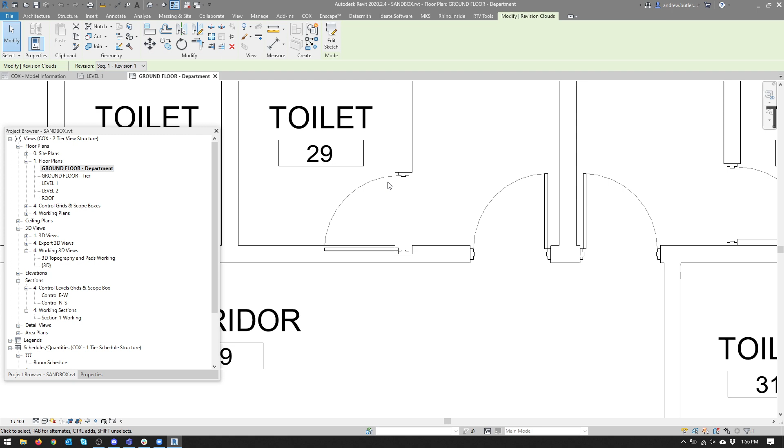So we can redesign the same thing we've done before over and over again from scratch, which is currently the way we're doing it. It's a little bit assisted with some of the Revit families, for example, from the past, with styling details like how a door connects to a wall, so you don't have to redraw it again. But I think what your role could be is to say, okay, can we inspect what we've got in the existing databases, take some information out of there, and bring it to a new design.

So when a designer—a senior architect—starts designing a new project, can I give that person immediately more information than normally? When you talk about visualizing everything, for example you mentioned going to the GSPS, using a script, creating logics so that for this project everything would be applying the law—little things like that.

You mentioned just then that it could be reused over and over again, like in different works. Does that mean once we create something we don't become redundant?

No. When do you think—at what point do you think a Formula One engineering team, running their Formula One car... I don't know how fast they go, but let's say they broke the world record for Formula One cars—at what point did they say, you know what, we've finished, we don't have to make this any better?

Well, but in that case, to improve something—the more you improve it, the more resources it's going to cost, right? I disagree. If anything, the more you improve something, the cheaper it becomes to improve further with what we're doing.

So it's easier—the same amount of effort it takes to improve it will yield even more improvements, because the amount of effort it's taken the world to try to digitize planning information, like producing a standardized digitized planning platform, has been very difficult and it's still not finished. But if you look at some countries and cities that have done it, now it only takes them an ounce of effort to improve that information because they've got it in a digitized format.

It's a really big learning curve, I guess, especially having to put it into words - very difficult. Like, I know what to type, all that kind of thing, but it's very difficult to actually get it working. Right, so that's my main problem - what's not working? Well, I understand the concept and everything, but actually getting it on my Revit.

Can you share your screen? Well, it's more the fact that I think I haven't modified the Python or the cluster or anything like that, and I'm trying to add has toilet, but except has meeting. Oh yeah, okay, so how do we do that? Is that what you're talking about? So you want to add extra functions to this thing. Yes.

We want to, in this case, divide the process up and tackle a different type of analysis.

When you say it has a meeting room, what does that mean? I was thinking if it just has one table, it will reconfigure it as a meeting room, sure, like how if it has a plumbing fixture, it's classified as a toilet. So someone hasn't named the room, but they've put a boardroom table in it, and it immediately gets flagged as a meeting room, which does exist in hotels and exhibition centers. They have hireable meeting rooms for conferences and stuff like that. That's what I was getting to. Cool.

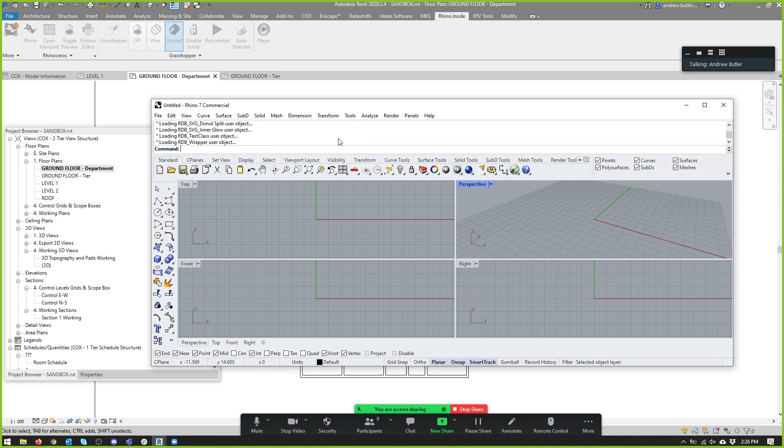You get to learn about all those different types of buildings. If you work on lots of different sectors, you get to work on sport and everything. You actually get to learn about what happens in the world behind closed doors, like the back of house of train stations or hotels. How do hotels actually operate and what do they need? You learn about people, and then you have to put that into your buildings. It's very people-oriented, like people trying to earn money and live.

Let's go back. I have to remember which CSS we were using. Was it CSS Dev? Yeah.

Andrew, can I ask really quickly? Yes. Why did the CSS that I copied to unit work? No, sorry, just the search. This is like a syntax question. Why is it like backslash-b unit backslash-b?

Okay, so this is regex. Have I mentioned regex to you guys? Yeah. And I guess you just coded it into the actual dev already, or what? Did you already code that in? Oh no, but yeah, it was an empty one.

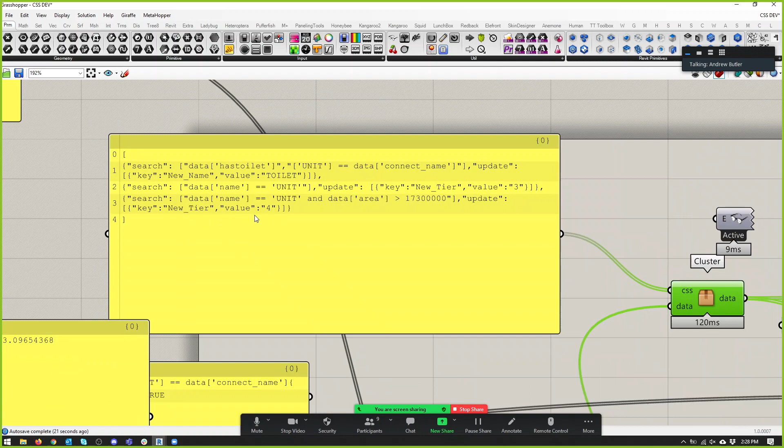And so that's what we're accessing when we type re.search unit blah blah blah blah. So the backslash-b, let's see if I can spell it... there we go. If we go to regexr.com, that'll tell us that backslash-b refers to a word boundary, and capital backslash-B is a not-word-boundary.

This gets a little complicated, but what it's actually doing is recognizing that the space is the boundary to the word. If I said 'hey, now I'm going to go right,' that includes also up here. Instead of typing backslash-B, instead of putting a space, we're saying we're only considering space as a boundary to a word. It's not going to pick up 'includes' that starts at the beginning of a line, and it's also not going to pick up 'includes' at the end of a line, because a period or full stop is not a space bar.

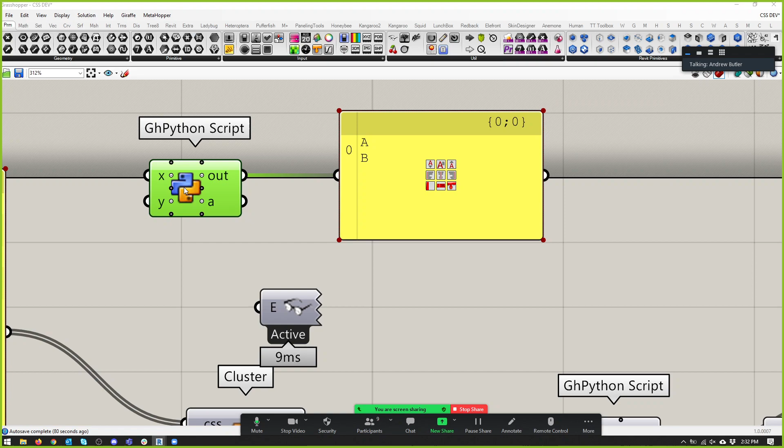So if I go 'hey, includes' with a backslash-B and backslash-B, it doesn't work, it's not picking that up. If I want that to work, I have to put a double backslash, which escapes the backslash and makes it a literal backslash for it to get picked up. And so that's what we're seeing here: we're writing this so that when Python reads it, it knows we're escaping this backslash, so that the regex we're writing is backslash-b unit backslash-b.

Welcome to the inception world of coding. But does that make sense? Yeah, no context. Yeah, cool.

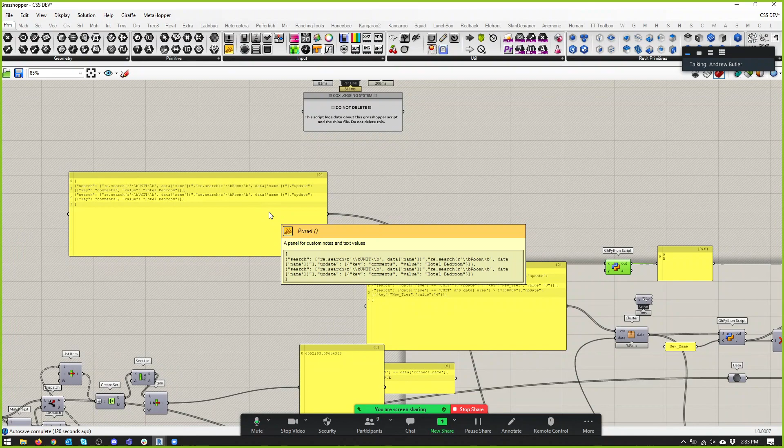Now back to your question. What we coded here is a super shortcutty way of doing what we need to do, right? What we'd rather do, I think, is, let's just say we're going to pick up, I don't know what families I've got in this job, but let's go see.

Place a component. What component do we want to place? Let's put a bed in, right, seeing as it's a hotel.

Let's say we don't want to call these units anymore, we want to call these bedrooms. Like we're going to automate that process. The thing is, that's going to ruin some of our other code, because we're saying that if a room is next to a unit, blah blah blah. But we'll do this anyway.

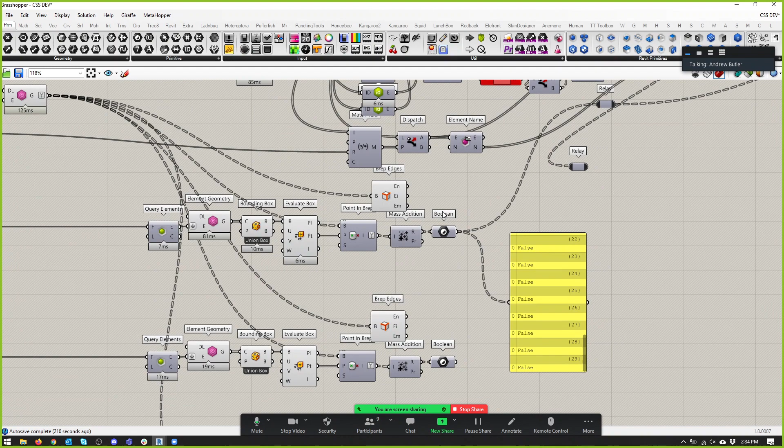So, does this have a room? Yes, and it's called unit. Let's just call it room, or let's call it test. What I've done poorly is, this is saying, hey, just grab plumbing fixtures and make a fixed parameter which has toilet, and set that to true or false.

What we'd rather want, I think, is some kind of parameter that just collects a bunch of things. So one thing we could do is say, okay, see this bed? It's called, like all these family names, says bed, rectangular placeholder, single bed, blah blah blah, lots of really complex stuff. What we could do is simplify that and just have in its class name bed.

And the bed is, let me just check its category, because Revit absolutely loves its categories. It's probably furniture, okay cool. And your meeting room table is probably going to get classified in furniture too.

So I'm also shortcutting, like I shortcut a lot. This is currently an instance parameter. You understand instance and type?

So if I place another bed, I don't know how to do this properly, because I don't actually know Revit well enough. But if I put a bed in this room, that doesn't have the class bed on it. So I believe what you have to do, if you go to edit type, you have to somehow make this family have class in here rather than out here. Does that make sense? Yeah.

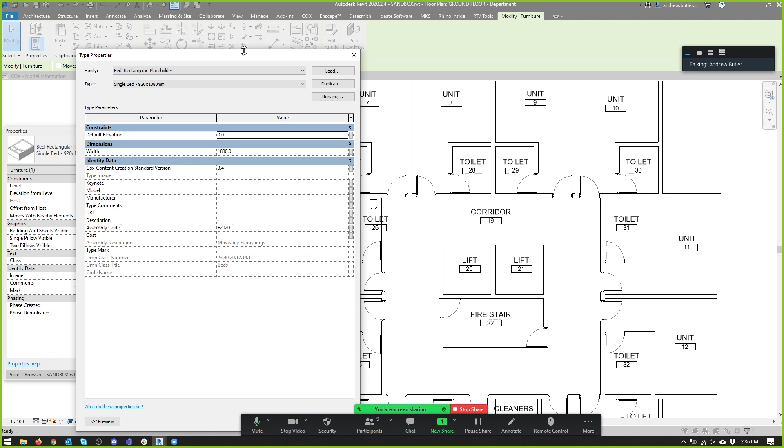Is it like when you mentioned that you get other people to pre-prepare for the CSS? Is that what they have to do? Kind of, yeah. Like you'd want all your beds to have the class bed on them. Yeah, so that way you can.

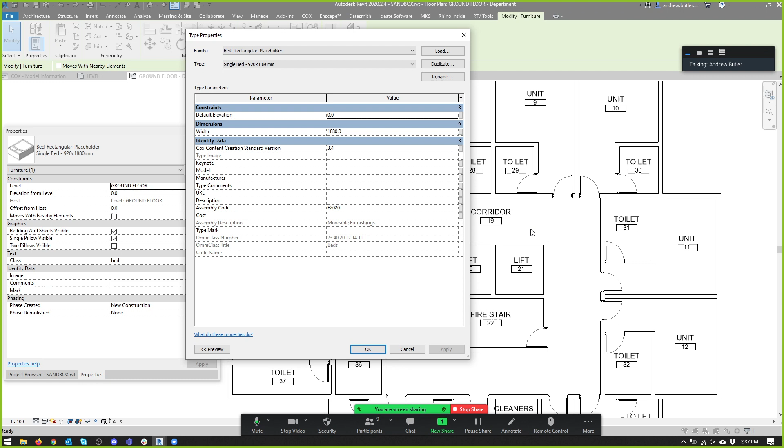Oh no, I think I know how to do it. But we have to define another parameter, and that's type based, and then it will show up here. But we'll use the instance parameter one for now.

So we'll go get furniture, and what this is currently doing is it's saying, this is going to get a bit complicated. It's grabbing all the furniture, and it's going to work out whether or not the furniture is in. How much furniture are we picking up? One? We should be getting 2 at least. Oops. 2, yep, so that's grabbing our furniture.

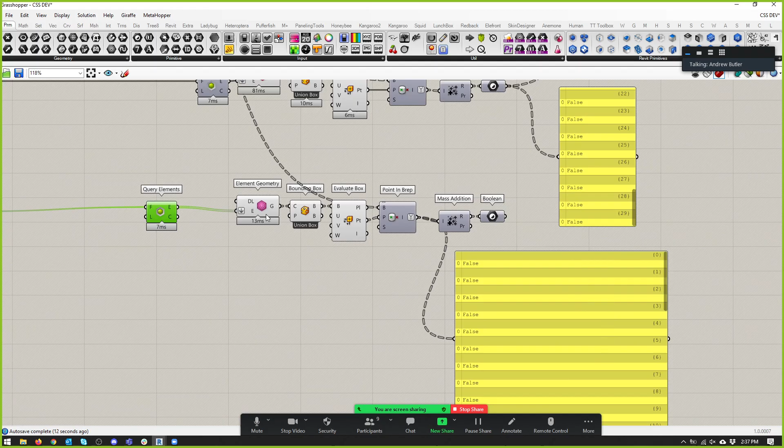And there it is there. Let's just get the curved boundaries of these rooms instead of their solids. So there's the 2 beds, and we're getting the center of the beds, and we're working out... so blah blah blah, there's 2 beds, and this is gonna end up being bad, I think.

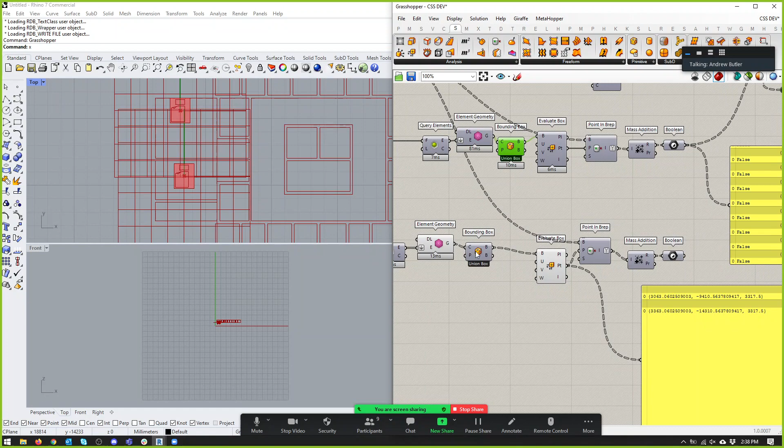Is it? It looks like it. These need to be, I think, flattened.

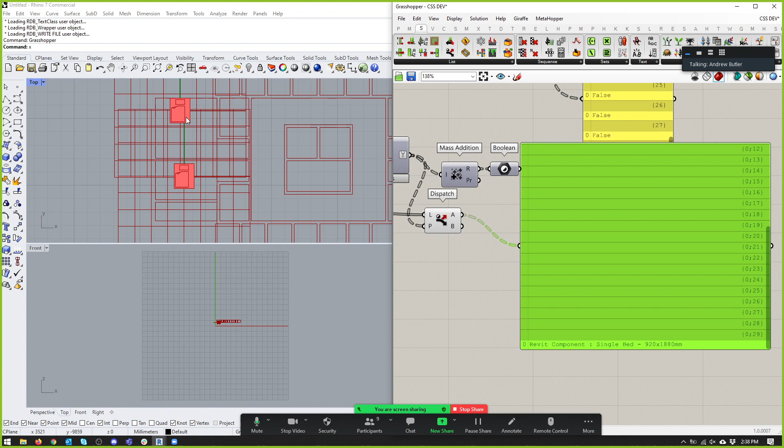So that's going to give us a nice true-false value set for the beds, and we can dispatch the beds per room. So there they are there. So now only, like, in branch 9, which is probably this room, there's that single bed, and in branch 29, which is probably the room I just mentioned, but let's say this room, then there's that bed, right?

And if I put more than one piece of furniture in there, so let's go grab an armchair. That's also furniture, cool, and we class that one. Oops.

One of these rooms has got the single bed and the armchair in it. So we can now move into not needing that 'has toilet' parameter, but rather saying, hey, just produce a list of all the classes in the room.

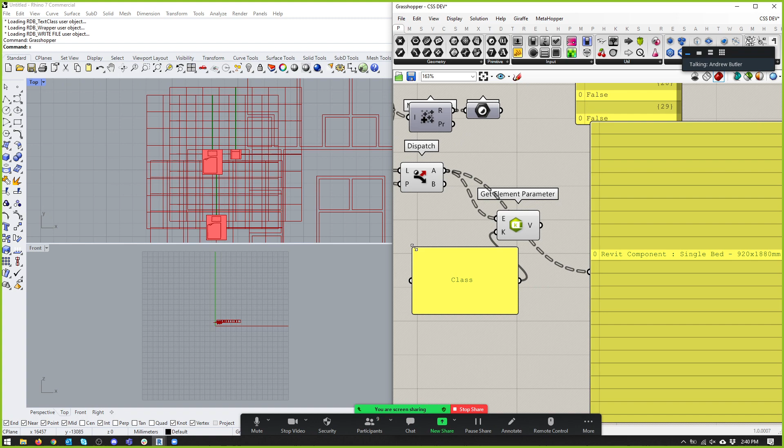So we can say, Revit, get us the element parameter on these objects, and the element parameter we want is going to be class, with a capital C. So there's bed and armchair. Class is just like a fuller version of has toilet, that element.

What we're currently doing is getting the class of objects that are contained in the room. And at the moment, it's only furniture.

Then what we can do, now class could be a few things. So if we say, okay, class is going to be like tags, the way we tag things, the normal way CSS works is it's just a space bar. So this is bed and it's also single. And this is an armchair, and guess what, it's also a single armchair. Like it's a single person armchair, right, a single.

Actually, this doesn't work, let's not do that. Let's just go armchair comfy.

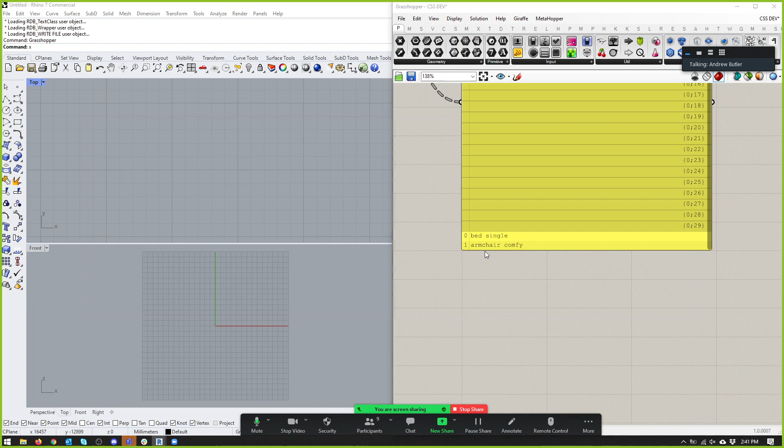So it's got a single bed in it, a bed and single. And some people might even say, okay, if you're going to write single as a class, it should actually be single bed, because we don't want single to get tied up with other singles in some way.

But then what we want to do is combine this into just a single list or a single parameter. So the way I would do it is I'm going to join my branches by using the delimiter that the class uses.

Why is that not working? Is it because these aren't actually texts? Okay, let's call it, I don't care.

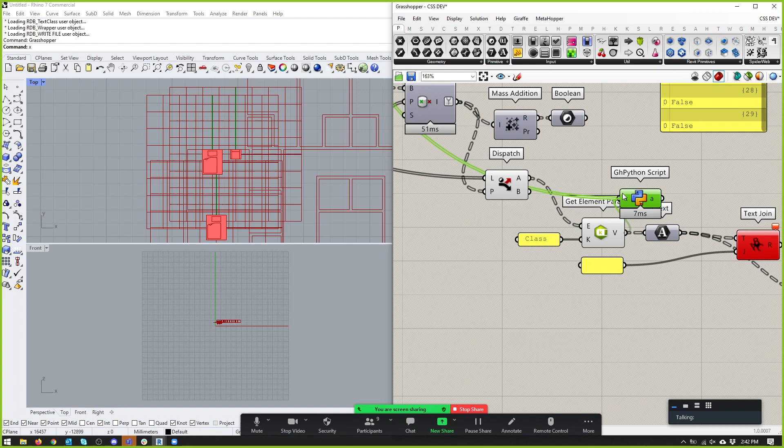Just so you're aware, did I mention this last week? The Revit nulls are different to Grasshopper nulls. I think I did mention this, right? There's a little Python component I've put in here. Yeah, there it is, that solves the problem. Actually, it's probably better to do it this way.

So that gives us a bunch of empties and these guys. Then we're going to split that because we're just going to turn this into a list. So we're going to split it by space, which gives us that list there.

We can probably get rid of all the duplicates. Do you guys know what to do if you want to get rid of duplicate values in a list? Think about Python. A list in Python is just a list of items, so I can have 1, 1, 1, 2, 2, 3, 4, and 5. What's the name of the object that can't have something repeating? Very close, if you use this object, it is a tuple... no, it's a set. Sets are things that can't have an item in it repeat.

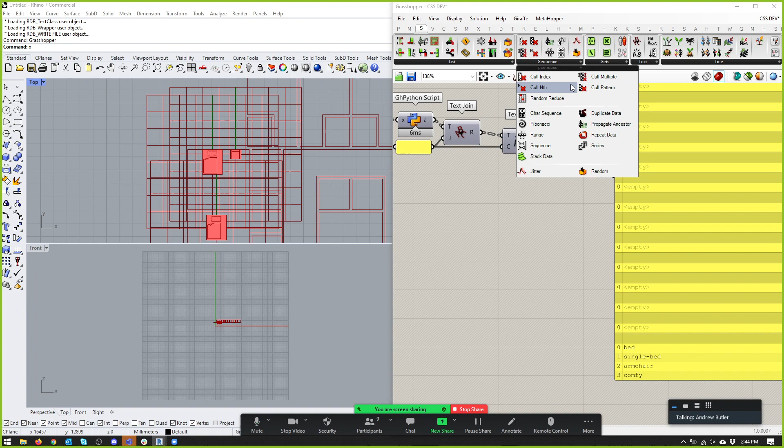If you do try and make that happen, what it's doing is it's thinking you're referring back to the item that's already there. So if I said add 1 to a set and 1's already in the set, it goes, it's already there, I don't have to add another 1. And Grasshopper lets you do that. So if you've got a create set function, it basically means that if we've got more than one bed in there, it's not going to be bed, single, and some hotel rooms do have 2 beds in them, right?

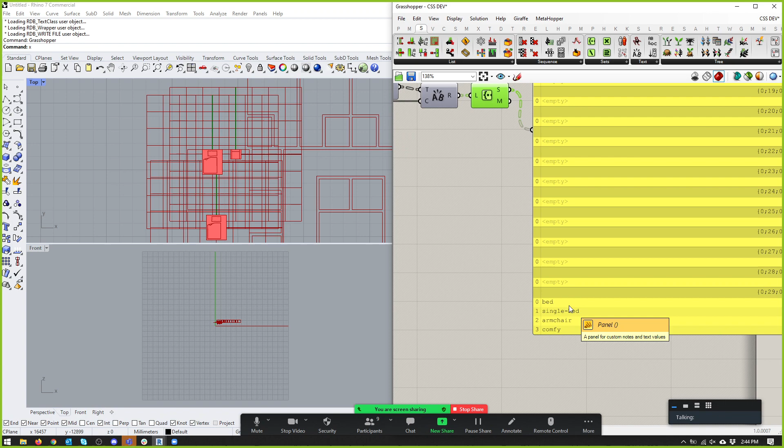It just saves us having to have a big long string of classes. And then what we'll do is we can either put this back into a delimited piece of text, or we could turn it into a list.

I've got this nice little component up here called listify. So we can use that, and that will produce a bunch of lists, one of which will have bed, single bed, armchair, and comfy in it as a list. And then this component here is merging all our parameters.

So let's just look at this one here, for example. If I drag this guy up, nothing's going to happen because it's getting put into this component that produces a JSON object. So if we now just look at this list, we've got...

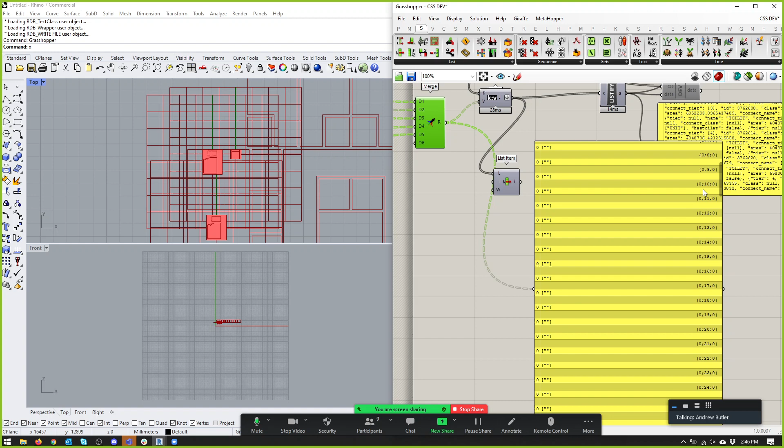Just the way merge works normally: if I try and merge something and their branches are different, they don't append to each other. So what I've done is I've made sure that the input to all of these other merges is simplified. If I make sure this is also simplified, now that last little list element is coming through here.

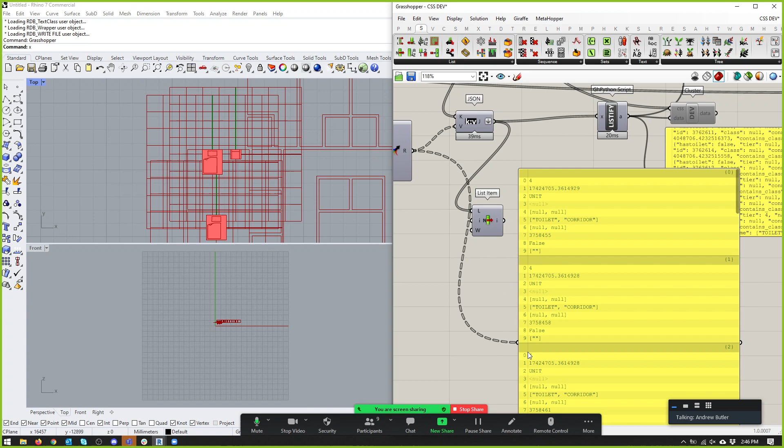And we just need to also make sure there is a contains class key associated with that. And so now our dictionary is going to say contains class list, sorry, blah blah blah blah blah blah. So this class is already in there, right?

No, it's connect. I put... where is it? Connect class. Oh, so we've got things that are connected, and we've got things that are contained. It's containing it, it's containing it. Does that make sense? These are the rooms that it's connected to. Yeah, this is the thing. This is things that are in it.

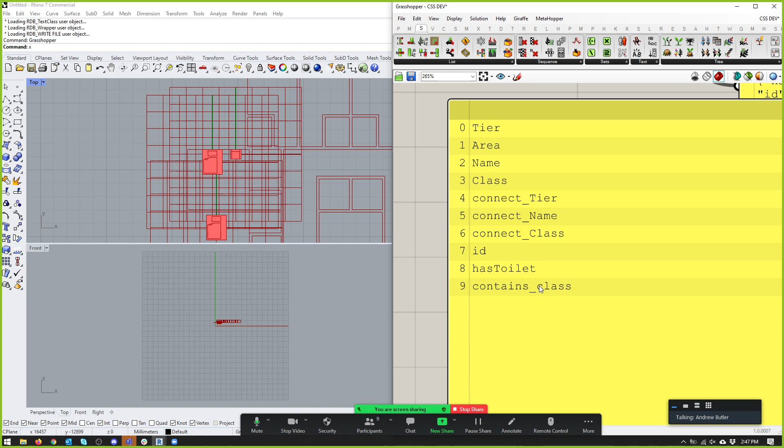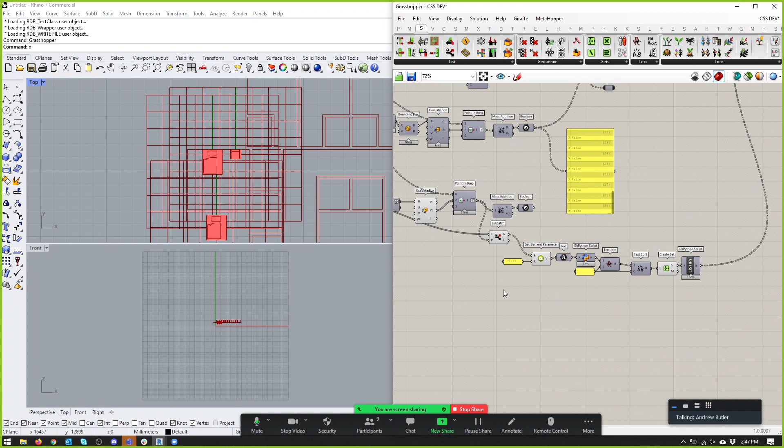But that code back there, when you wrote the contains class, it picks up class as the... because I've just said only get us the class. We could get it to pick up other things, like the quantity of objects, or the name of the family and all of that. But let's just use class for now. The fact that class exists, it just corresponds, it just falls in line.

So we can then say the search function is going to be data contains class, and then we're going to look for — we're going to get rid of this just to clean it up — we're going to look for 'bed' in data contains class. The cool thing is, if we didn't do it as a list, if we did it as like a string delimited thing, then we could use regex instead. So there's a benefit to doing it one way or another. Do you know what I mean?

We could also technically just join any list with a space and then do it as regex with Python, but whatever.

And then what are we going to do to said room? We're going to say this is not actually the CSS that I'm using, is it? We're going to say new name is hotel bedroom. Yeah. Oh, it is the CSS. No, it's not. Let's just copy that over.

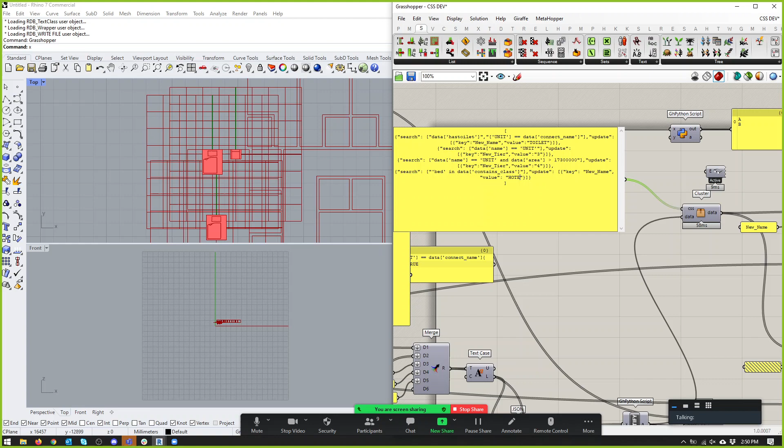And so now this is probably going to have — there's the hotel bedroom — and it's running. So let's just go put a tag on that room. Now this is messing up quite a lot because we were using unit for other things, but let's assume we're doing meeting room instead, right? And so tag all my rooms with the room tag and just show me the name and the number.

So there's hotel bedroom. That doesn't have the class 'bed' on it, right? If it did — I've forgotten where to get my view user interface properties — hotel bedroom.

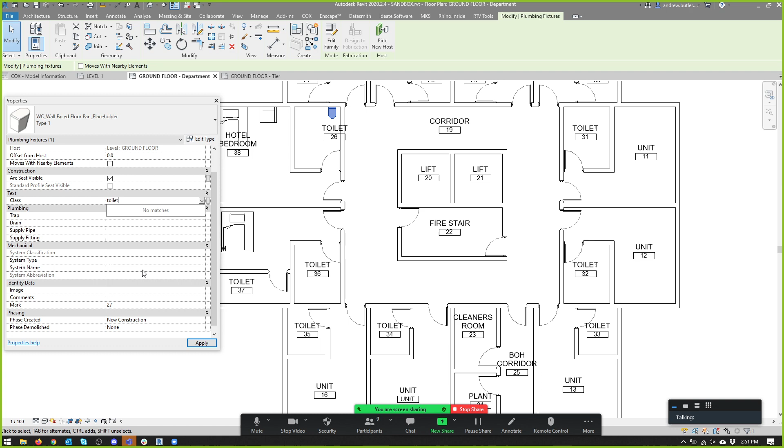Cool. So now, if we also included plumbing fixtures in this, then these rooms with toilets in them are also going to have a toilet class, right? So it's not like this doesn't just have to be furniture. There's the toilet, and so we could potentially get rid of this crappy parameter.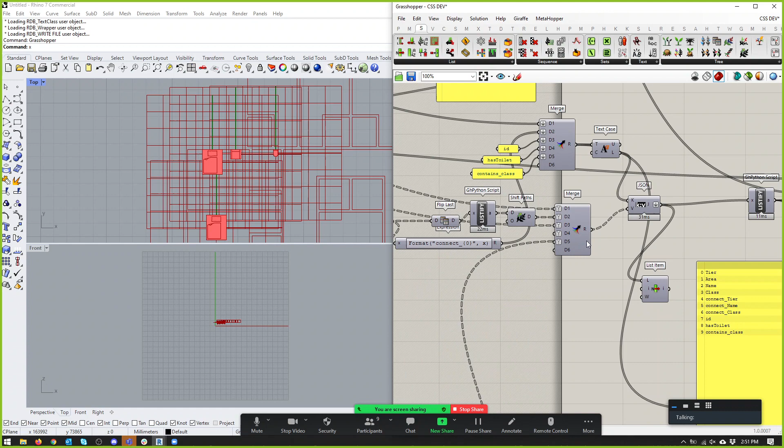And this one. And then up here we had 'data has toilet equals', like it has a toilet in it. Rather we can say — we'll copy this guy — toilet in data contains class.

Huh, it's just a little more complex. Now that means I can put other plumbing fixtures in and we can write more, better versions of code, right? Everything changed to toilet. Huh, everything's toilet now? Yeah, I know, because it... Hang on, can we undo? Yeah, cool.

Isn't that focused on just like the actual object or the project? So that means are you just naming explicitly, because on your Revit, right, the tags are centered on the component itself? The tag is centered on where the room center is. So there's the room center. If I auto tag this, it's gonna put it there.

This is actually something I want to do better at — not with you guys, but I'd like to write a script that recenters rooms based on how the tag will show up. So if you stretch a model in Rhino in one direction, the direction you'd be reading left to right, and then you find the centroid of the model.

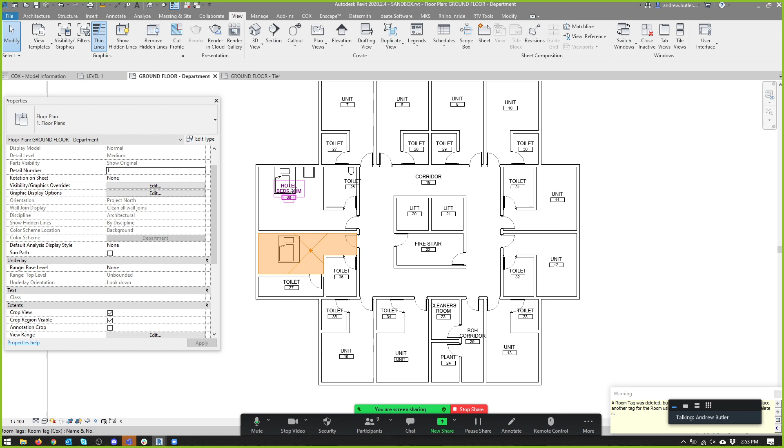So in this case, the centroid of each room — the centroid would kind of be, centroid is actually the wrong term, the center of mass of each room. So the center of mass would be roughly there. That's also not quite true — it's the point furthest away from any edge.

And then move the position of the room so that it's there, so that whenever a tag does get put in, the tag is in the most reasonable point.

I don't know how I just got hiccups, but I just got hiccups.

Isn't it because Revit does this automatically? Is this Revit's automatic placement? No, I placed the room. So it was me, it was the human that made the stupid error of putting a room in. I just deleted a room, I shouldn't do that. But does Revit have an automatic system already? Or no?

You have to do that stuff manually. So someone in Cox is manually putting all those room tags? No, they're automatically putting them in. Okay, let me rephrase.

Someone in Cox, this is the other annoying thing. Most people will go clean this up. Like, let's say these guys here are down here, right? And someone goes, that's not good. What they'll do is they'll grab the unit and move it up there. They'll just move the tag. They'll clean the tags up and leave the room position alone, right?

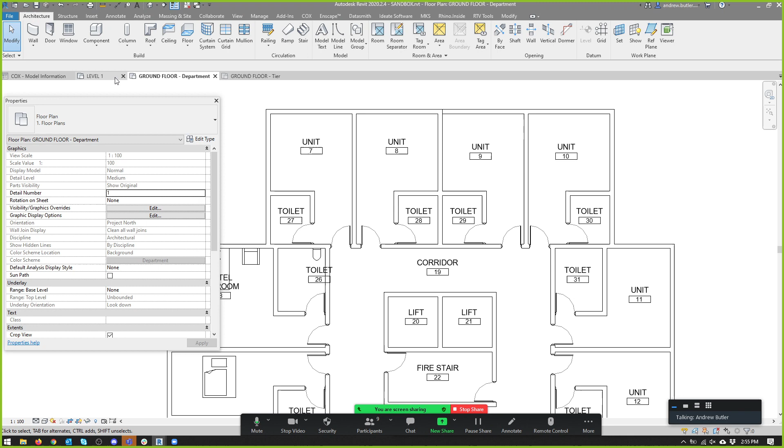So if the tag gets deleted, its position also gets deleted, and then if you automatically retag, things die. And also, I'm going to go to another plan and delete all the tags. I want you to see how dumb Revit is, and think about it.

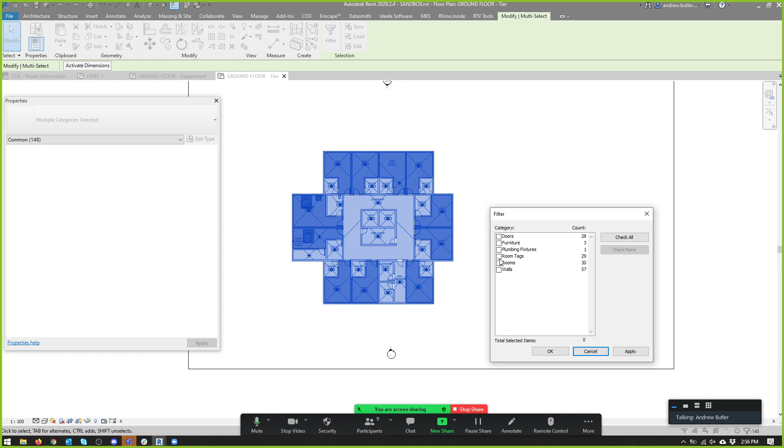How easy would it be to simplify this whole process, right? It's pretty simple. I'm going to pick this wall up and move it, and pick this door up and move it. Actually, this is the wrong place to do this. Okay, I'm going to grab these walls and just make this whole section bigger.

Now look, it dragged the tag with it, right? But what didn't it do? It didn't change... look, it didn't change this center, but it changed this one up here. Why? Because there's some silly code that's trying to be automatic, and it's just not doing it perfectly.

And so sometimes what happens is, I don't want that. Sometimes, see what just happened there? I just want to drag this line segment down, but when I do it, Revit goes, oh, you want to do that? Okay, I'm going to drag everything down. Isn't it locked? I don't think it's locked.

So what someone would do instead is think around Revit, and then they're going to have to remove this and all of those types of things. The fact that you can't automatically center everything is not programmed into Revit, but you could program it into Grasshopper, but we're getting sidetracked.

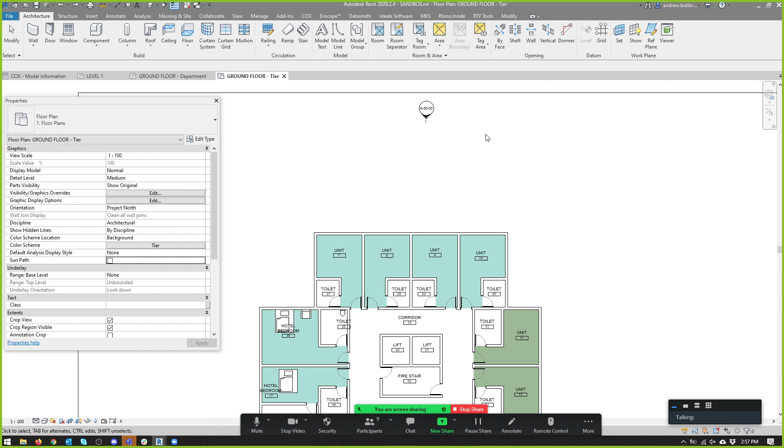So with the JSON loads, and then you did the comma. So with join, hang on. So join CSS one, this guy? Yeah. Can you just explain what it does again? You said it gets rid of the spaces or something.

Okay, let's not do the loads. I understand the loads and dumps. I know, I'm not going to talk about loads. Yeah.

I'm going to write a really simple CSS script. It's really, really simple. It's not going to do anything, right? What does this mean to you?

Is it a list in... it's a list. Yeah, it's a list of what? Is it keys? Huh, let me keep going.

I'm going to make it less simple so that your brain works. I was actually watching this, I forget what it's called. Key value? Yeah.

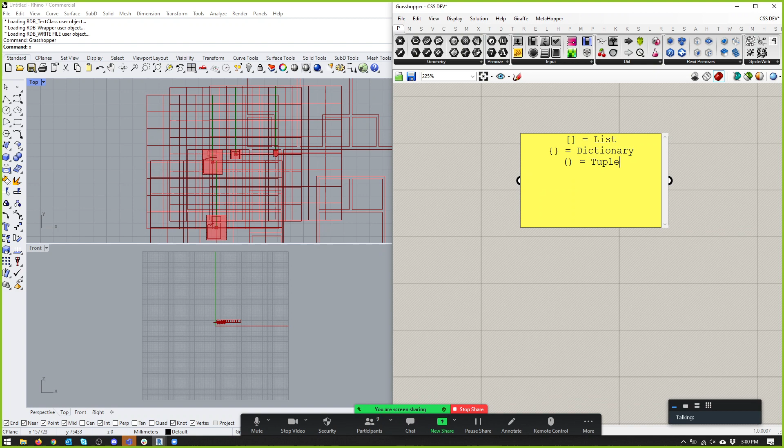Cool, sticky notes. Is it going to be useful? Yeah.

That kind of makes sense, right? Yeah, cool. And a variable can mean anything, so a function is a variable in a way.

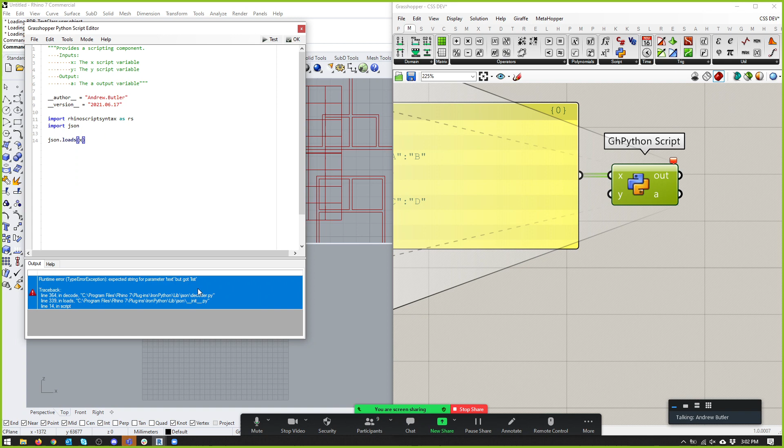So we've got a list of dictionaries, and in our dictionary we have a key and a value, right? But if I try and JSON load that as a list, it errors. It errors because it needs a string or text, but instead it got a list, because it's a list of strings.

I'll just print X just to show you. You see what's going on now? What does this tell you? This is different to this, right? Yeah, there is a list, and that's a string. And that's a string with a tab because I added a tab, and that's a string, blah, blah, blah.

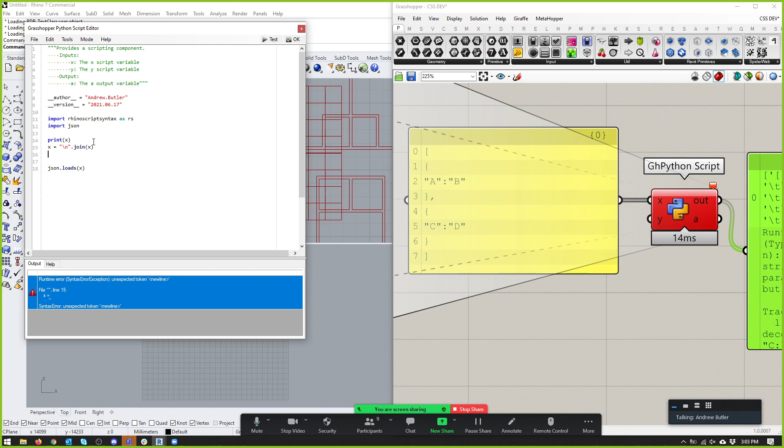The JSON import requires just a single string which represents your JSON object. So what I'm doing is I'm saying X is nothing, but it could also be new line, and then it just goes through dot list join, the list. So when I print X now, it's the string representation of that list. And now it loads, see, there's no error.

That's all that's doing. How come it's still stacked? Is that just because I typed new line there? Oh, okay, if I put nothing, it'll join it all together. But the JSON import function can understand the stacked version too. So this is the other thing.

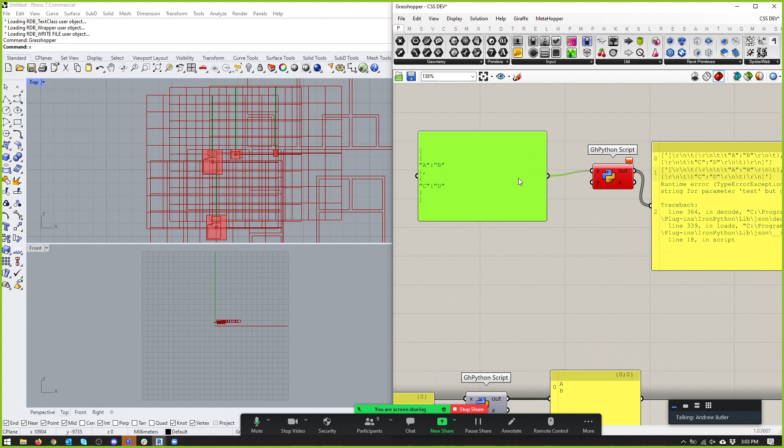If I didn't do this, comment that out, and we said, hey, use multi-line data, so now that's a single object. Is it erroring? Why is it erroring? Oh, it's still a list, because see this list access? It's still always going to make it a list, no matter what.

So if we want to enable the function of this to be good, so we can even put multiple CSSs into the one thing, then we have to enable it as a list and just join all those lists as one object. And then we're good. So that's what that's for.

Any other questions? Huh? There's probably one hiding.

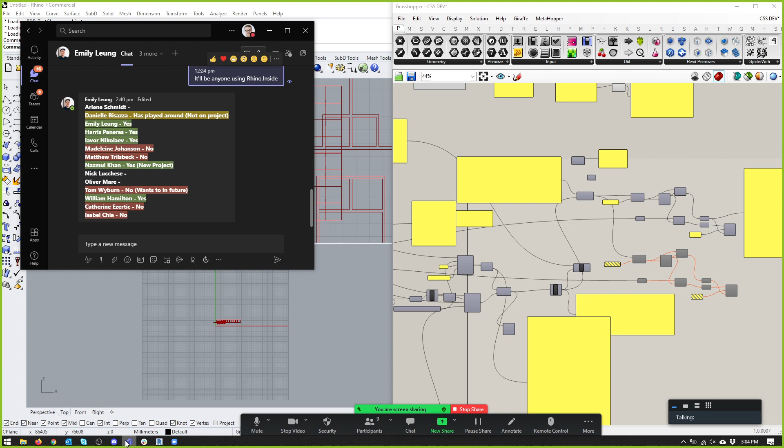I guess it's kind of a theoretical question, but if you use this so much, do you reckon you'd see this being written as a more readable thing? Yeah, in a more readable state? I think it's going to look more like you make it like a plugin, I think it's going to look more like this.

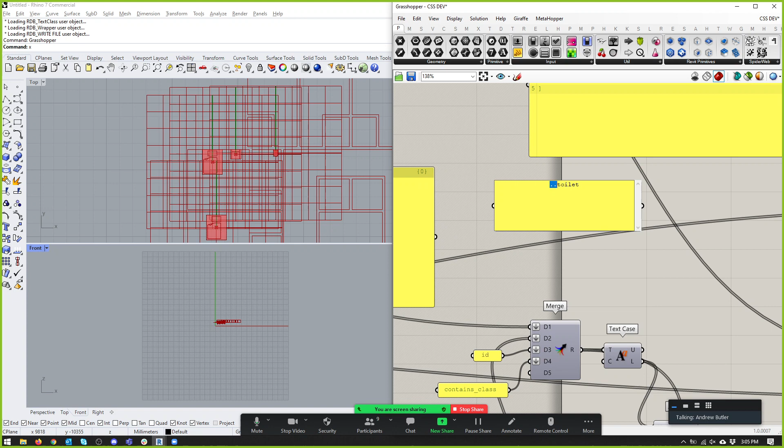So, dot toilet. Like maybe double dot toilet contains the class toilet. Name is toilet. That's way easier to read than this, right? Yeah.

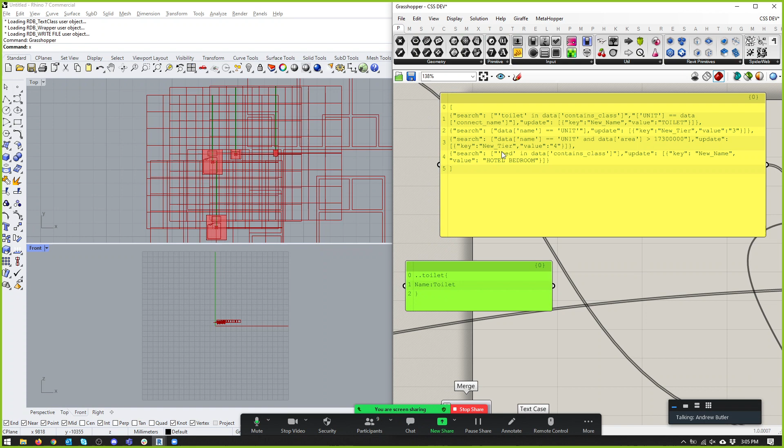The thing is, the reason this is good for you guys right now is it does require you to think in Python operations, which is good because I want you to. But yeah, we could come up with a much simpler syntax. And the one that I just had here...

Actually, like this question mark one, this doesn't exist in typical CSS. So CSS search, they're called search operations I think. CSS search, what else could it be? Selectors, that's it.

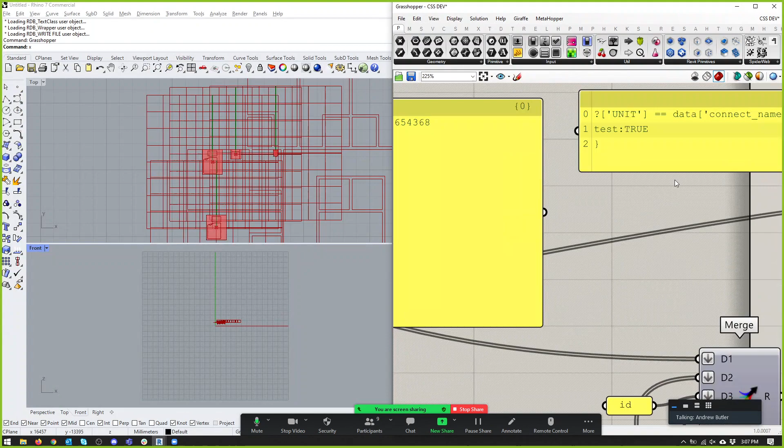So this is like all the various different stuff that has been developed for web dev. So there's, dot means class. Stringing a bunch of dots together just means it has to satisfy both, that's 'and'. Dot name one, dot name two, means dot name one and dot name two. Putting a space means it's to do with a descendant. So we could say, hey, just get any.

That's what that double dot was. So let's just do, what did I write it? If I went, hey, just go grab any room object, and then that contains... no, that doesn't work. Never mind, this one I don't, we'll ignore this one for now. ID, get anything, get the element, get an element with its class, blah, blah, blah. None of that stuff allows you to write JavaScript as a selector, right?

There's no sort of crazy, hey, you can write re.search, something really complicated. And so what I was considering was, if you start any string of text with a question mark, then it could understand this as being your complex Python. So you can write within a system the complex Python and also write dot toilet name is toilet. But this all just makes it easier for us to play around with the syntax and stuff.

You'll notice, they don't have greater thans here. Oh, yes, they do. No, they don't, forget that one, that one's parents or not parents or whatever. But there isn't an attribute that is equal to or greater than a value, which I think we want in architecture. So we have to start layering into the system an architectural CSS style, because greater thans, less thans are really important to us.

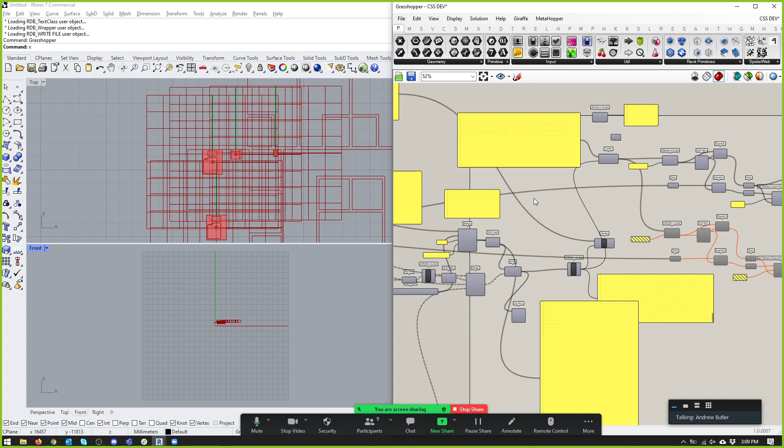Shall I talk about what we need by next week? So, you guys are going to hate me again, but I don't care. What I'd like to see is some CSS written for this space.

There's a few things you could write CSS for. You could write CSS for the rooms, which we're already starting to do, and you're playing around with turning things into meeting rooms and stuff like that. There are also doors here, and you were playing around with door analysis a few weeks ago, so you could write CSS for that as well.

But it's basically the exercise you've been doing over this last week, combined into a single report and script and CSS being submitted, right? Some ideas for you to move forward.

This is only a one level building. It's very easy to add extra levels, and I'm happy if you just do that - you can copy these levels and stack them on top of each other. That means you could be analyzing something other than just the name of the room, but also its elevation or level name or whatever. You guys should be good enough with Revit to do that, right? To take this level and repeat it a few times.

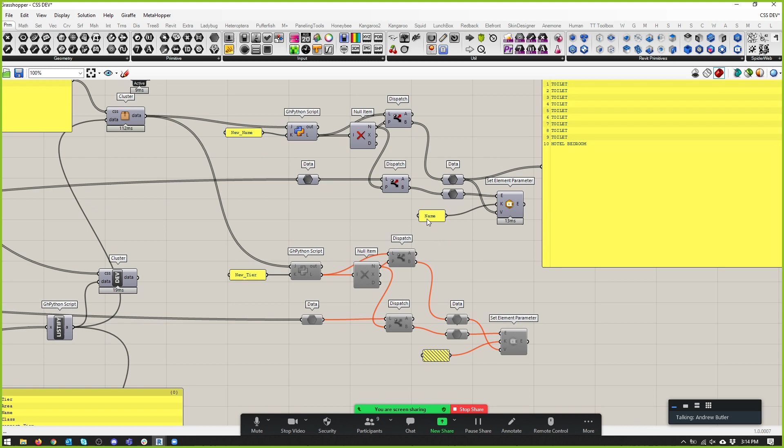I'm not going to do it, but we'll talk about how. Can you guys see? Sorry, can you explain that again? What was going on?

So at the moment, this script is picking up only this parameter, new name. It's saying go get the new name parameter and apply it to our model. We have a fairly good filter that filters out anything that doesn't have new name, filters out all the parameters that don't have that, and filters out all the rooms that don't have a new name. Then it uses the set element parameter to set those parameters on those rooms.

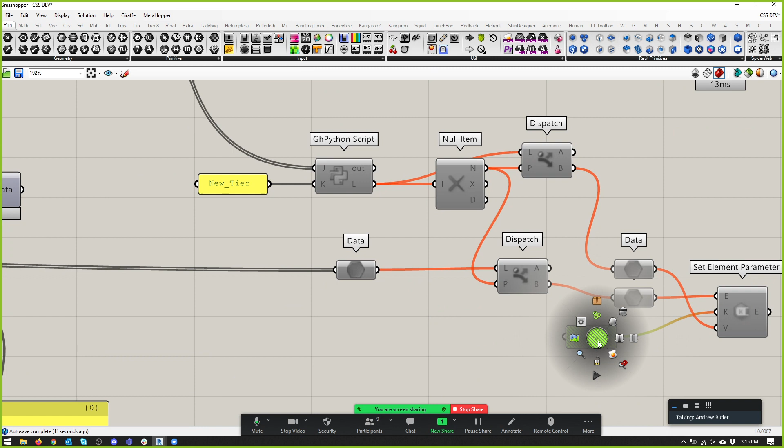So if I was to say, okay, I want this to be able to do anything - new tier, new department, new class, new anything - one thing: can you see a pattern between these? Is there a pattern between these two that's also a pattern between these two?

You make name or tier like a variable. Or more so, if we just got rid of the 'new underscore' prefix, then the thing that's left over is the parameter that we're going to change.

Okay, look, so this thing's spitting out data. And if this thing's looking for new name, but rather if we said - print I, let's just have a look at what it is.

So these are all your data sets. If we actually look at those data sets as lists, for K in I, K meaning key - actually, I'll write this in English. For I, for data - so these are the keys in each of those objects. Contains class, tier, name, connect tier, ID, class, blah, blah, blah.

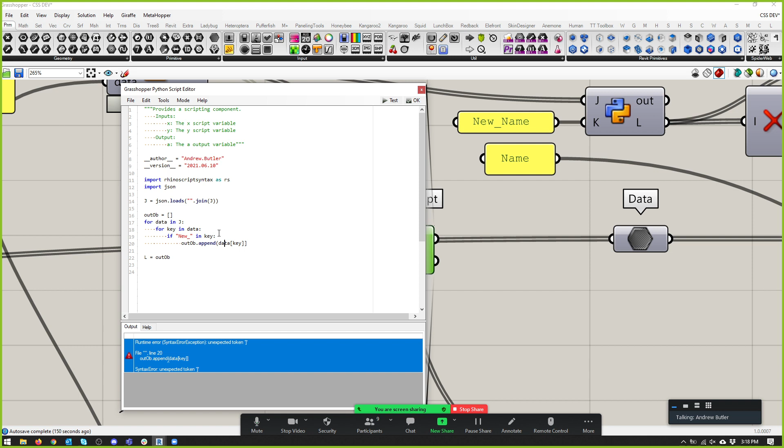Can you guys see that logic? For each data object, for each key in each object, if new underscore is in the key as a string, then append data key - or you could almost say that's how you want it to run. And so this out object is going to get...

broken because I haven't written this properly. This out object's just going to get messy because - oh no, it's not. So here's all the new tiers, and then there's all the new names, right? Now, that's not necessarily going to work for us. How come that's giving us tiers first and then names?

Because it's ordered - no, but it shouldn't be. That's a weird thing. Let's have a little explore into how it's dealing with the data. If we print each object each time, it's printing - this is the first object, it hits contains class, tier, connect tier, blah blah blah, and then it hit new tier here. Okay, and if you actually hit something with new, just print it - so it hit new tier and then it appended that. Oh, I know why - it's just by chance, the list of rooms that have tier modifications are before the list of rooms that have just name changes. That's why it's stacked them up in order. Okay, that makes sense.

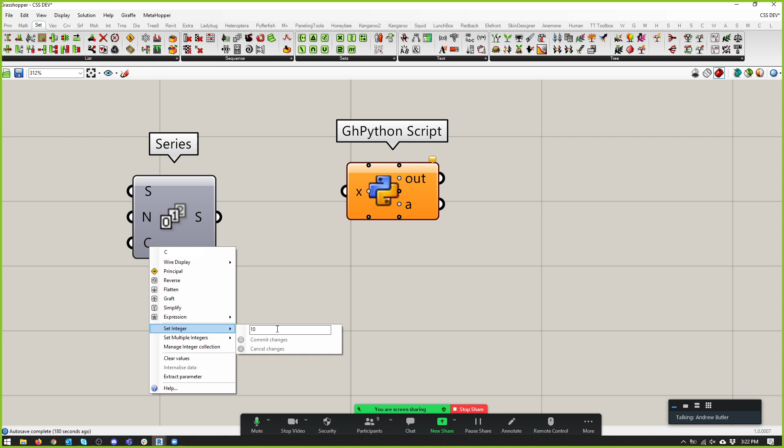We'll turn on tree access type, and I'm going to write a simple list that's going to end up being a tree. I'm going to make a series that's 4 items long. Is that going to work? No, it's not. I'm going to make it 8 items long.

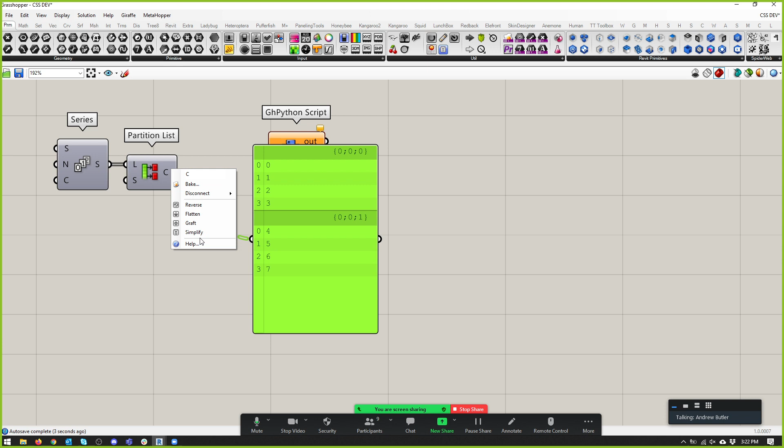I'm going to partition that into a partition list of 4, so there are 4 items in each list, and then I'm going to partition those lists up into 2. And guess what? We've now got a tree, where branches are structured a certain way.

I'm going to plug that into X, and I'm just double checking that it's got tree access. Why is it erroring? Okay, cool. And if I print X, it's going to give me this object, which is the point at which I'm going to start doing some reverse engineering.

Some useful things to explore in Python: there's a function called dir, and if you use that on any object, it will give you a list of all that class's inbuilt functions. So if I run that on this object, dir x, it tells me it has functions like add range, all data, branch count, branches, clear data, etc. Those are functions that exist in the Python sphere and have been documented on that object.

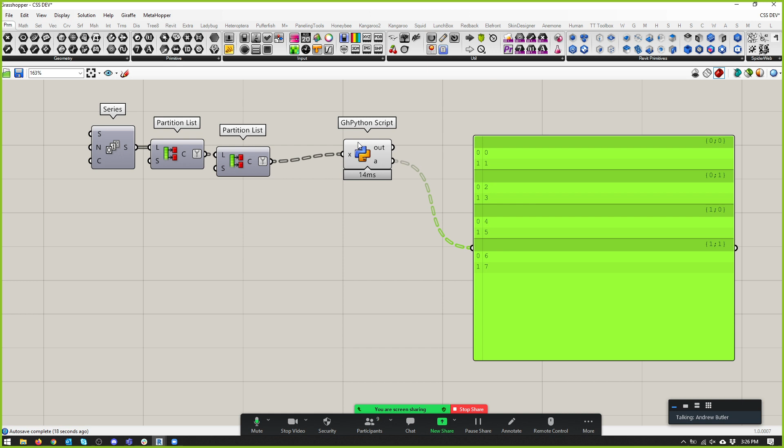Cool. Okay, so when I hit that dir function, you can see there's flatten, graft, insert, item exists, merge structure. It looks like a lot of all these functions that I'm used to using up here kind of exist in Python as well. There's even branch count, branches.

Let's just quickly do that. I'm going to get rid of the doc — we don't need that — and I don't need type. But we're going to keep that dir function up just so we've got it as a reference. So, print x dot, let's go branch count.

And that might be a function. So what's a nice simple function that we know of all the time? Length. So if I say print length — is it length or len? Len, sorry, I do too much JavaScript coding as well. If I print len with an argument, then that's going to print the result. So there's 4 — we've got the same number of items. It actually ran.

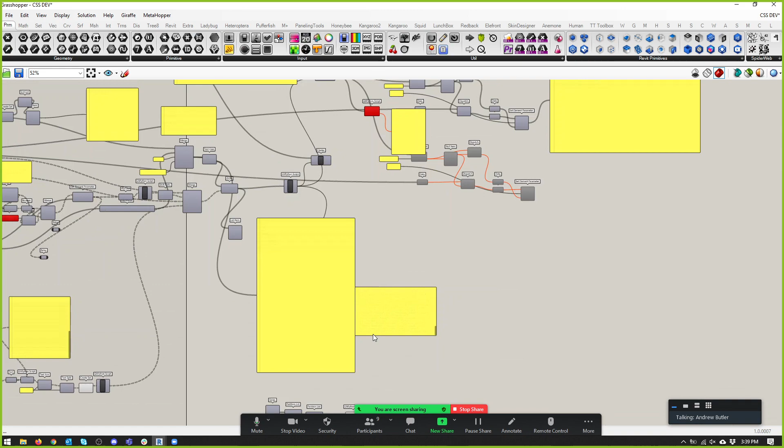So if we get back to this, there is a way of solving the branch system without using branches. It's the reason I haven't really done trees in the past, because I've had ways to cheat. And the way to cheat is—if we cast our mind back to this particular script—this is appending the value to this list. We can also append to... we'll call that data out of A, make that B.

Out of A, we can append the key. And we can actually append—we can do something to the key as well. We can replace 'new' with nothing. So that way... hold up.

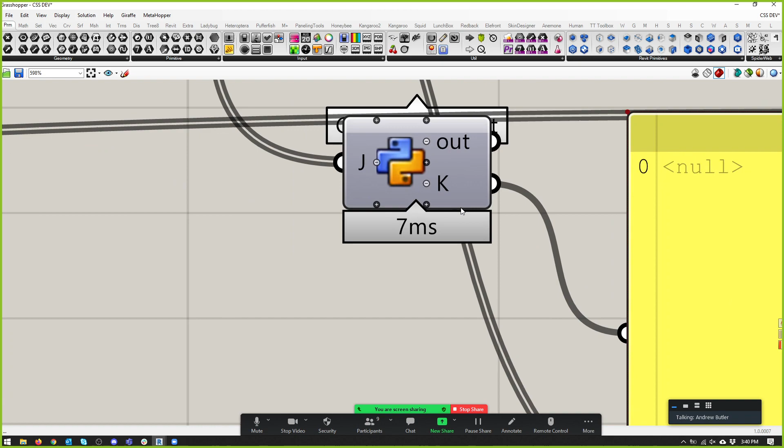So we'll call these keys to change, values to change—key, value. So those are all the keys, and those are all the values, and they're not working. Why are they not working? Out of V. Okay, cool—so there's all the keys, and there's all the values.

Now, the other thing is we probably also want to do one more thing, but before that—we're in the data, we've hit that object, and we're going to say number of variable changes, number of news, equals 0. We've just started with that object.

And as we go through the key, if we find 'new' in there, we'll say, hey, number of news, add 1 to that. So when we hit the end of that loop... I'm being too fast for you guys, but whatever. Sorry.

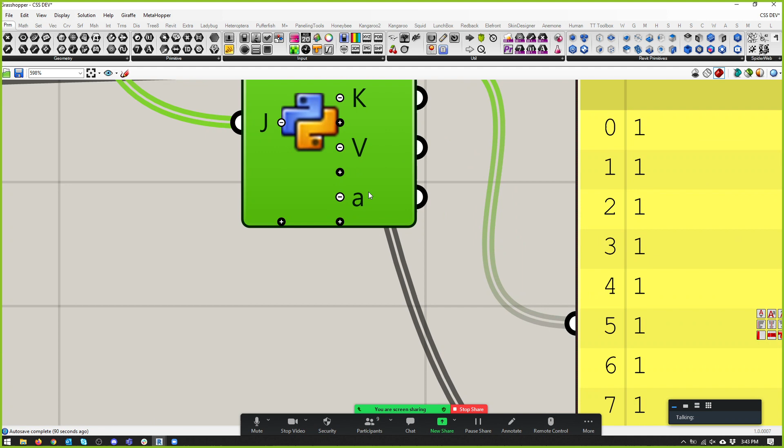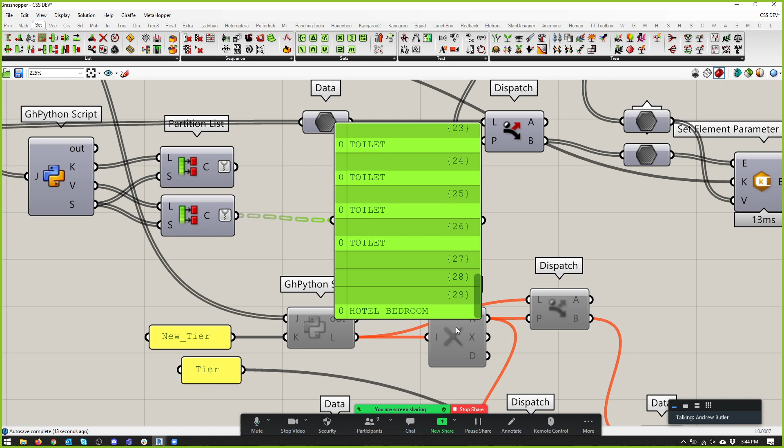Now split - oops, need to run it. Split is a list of numbers that we can use to partition our keys, and it's also the same partition that we can use to partition our values. The one thing this isn't doing is giving us a really complicated data structure, but that's fine, we don't need it.

But this is the thing, right? So we've got a bunch of rooms here, and we have a corresponding branch structure of the keys that we want to change. So there's each one, and in some of them we don't want to change any key, so there's nothing, and there's nothing to change it to. And some of them we've got name, and some of them we've got tier.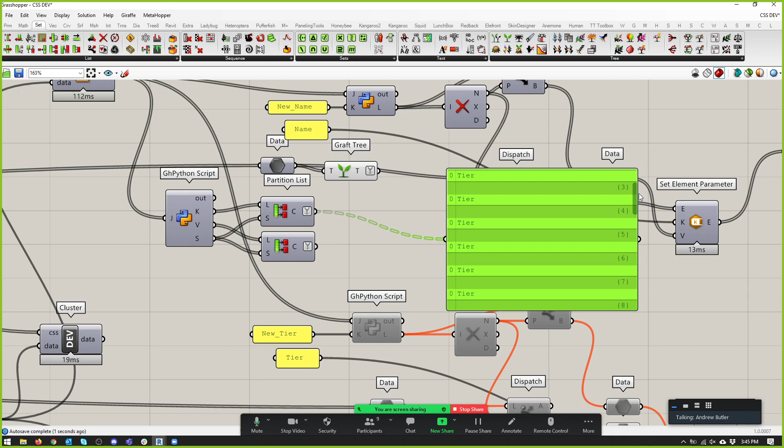So we should be able to just do this. We should be able to plug that branch into there. We should be able to plug all of our keys in, and we'll be able to plug all of our values in. And we've now rewritten this code so that it will function on any new parameter. Did I just go way too fast?

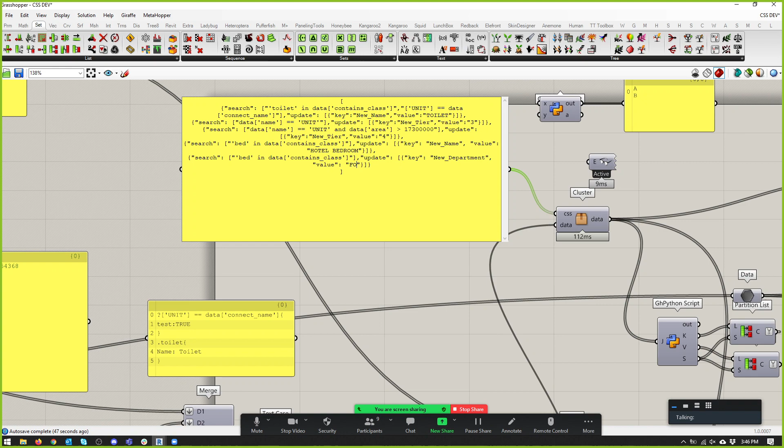Okay, but does that make sense? So the reason we want it in trees is so that, look, I'm going to also do this. If there is a bed in the bedroom, also change the department, new department, to department, nice, to front of house, let's say. And that's going to pick up - ooh, that should work. So it's going to pick up that we want to change the department and the name, and it's putting that in that single branch. And the department is going to be changed to front of house, and the name is going to be changed

to bedroom. And actually, let's go look at our Revit model to see if it's did, because it usually is when you're writing these codes, because things change as you work. I think it was like this guy, right? Look, it's department's front of house.

So when you're writing your CSS, if there's a parameter in Revit, make sure that you just type in the exact name of the parameter and then put new underscore at the beginning. And if you follow through this system, then it will write it there. You don't have to write - we can now delete this and delete this, and we don't have to write any more code to make changes to Revit using that system.

And I've just done part of your assignment. So basically, we could use this again and again. Yep, look, what else do you want to change? Instead of the department, we want to add comments. Cool, no more code - the only thing we needed to change was the CSS.

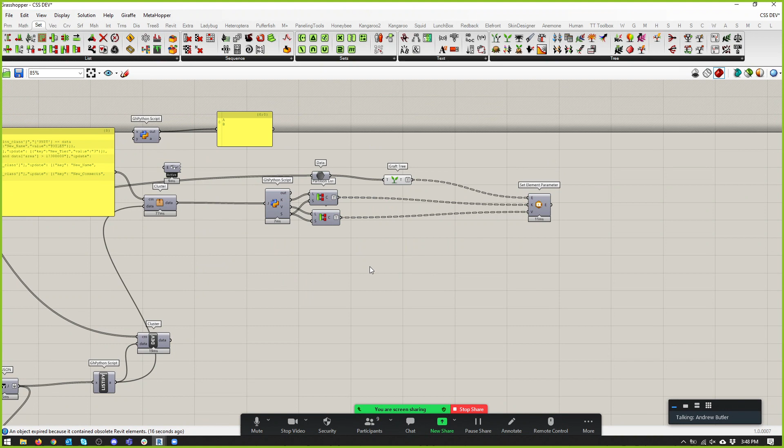That's it. Now, there's a lot this could be, right? If you want to add stuff to the model, like add windows, then this needs to be able to not just put parameters on a room. It needs to be able to do other weird, wacky things. But that's potential for you guys, right?

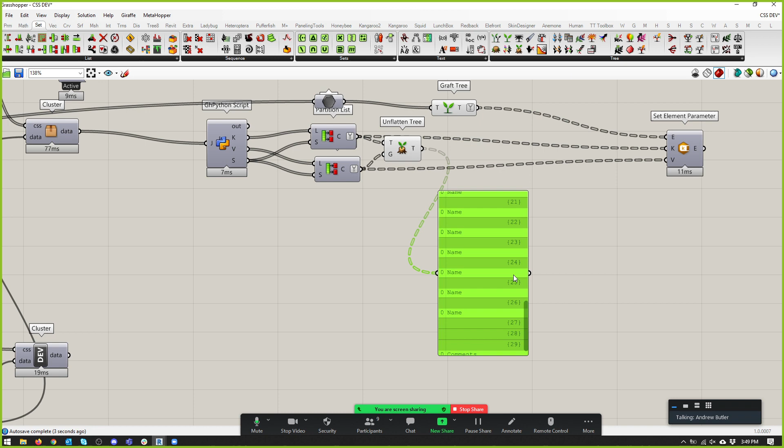You've learnt my cheaty way of getting out of having to write trees. Also, if you've got a really weird tree - so you see this tree is coming out a certain way, but for some reason we need it to come out with a much more advanced data structure, then you can use this Unflatten Tree. If you have two trees with the same length but a different code structure, like an address for each branch, then that will set that up. And let me demonstrate that.

So if I grafted this, you can see comments and name. That then grafts comments and name. It matches this tree to match that tree. So if you do what I've just done there, get Python to spit out the lengths of the lists for your tree, and you can get Grasshopper to just build your tree for you if you need it.

Cool, but by next week I'm probably going to have worked out how that Python tree stuff works. So back to this long arching goal - what we need by next week is to start filling this out with more information, better CSS, better analysis, and better outcomes for the script.

Like, so there's a few pathways you can go down. You can make just better CSS. You can make your script better, like what we just did today - we just did two really cool things with our script today, right? We've done a contains, and we've done writing parameters to the room, more and more parameters. So you're more than welcome to start adding more families to the model that control it better. And then there's also analyzing the rooms, so like you make more rooms.

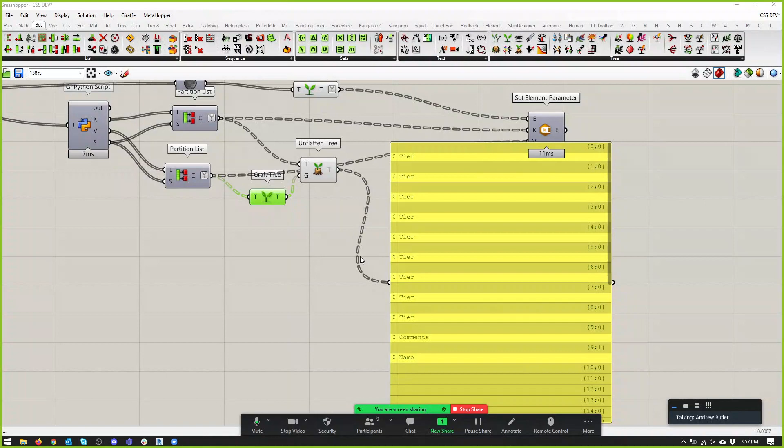Okay, wait, so with doors, what's the approach there? Obviously you're doing like the toilet door, for instance, that would be different. Yeah, it would be, but what parameters are we changing? Just put, if you can't work out what parameter to change on the door, just chuck everything into comments.

Okay, but it doesn't touch anything in Revit? It will. So if you go back to the properties on Revit, for the door, obviously this class, we can change all of these things here, and then we just need to type in. We can copy these, and we can add stuff as well, add parameters if you were thinking. But if you can't work out what parameter it goes into, just add it to comments. You can just open another Revit file and play with a door there, and then add it to comments.

So look, you can see door closes. This is a Cox door, so it's been designed in a way for it, it's okay.

I've got an event from here, this event at 4. Is it like a club or something? Yeah. And it goes for how long?

Check if it is this room. It is this room, it's this room. You did it last week as well, right? Yeah. Because I don't want to be annoying.

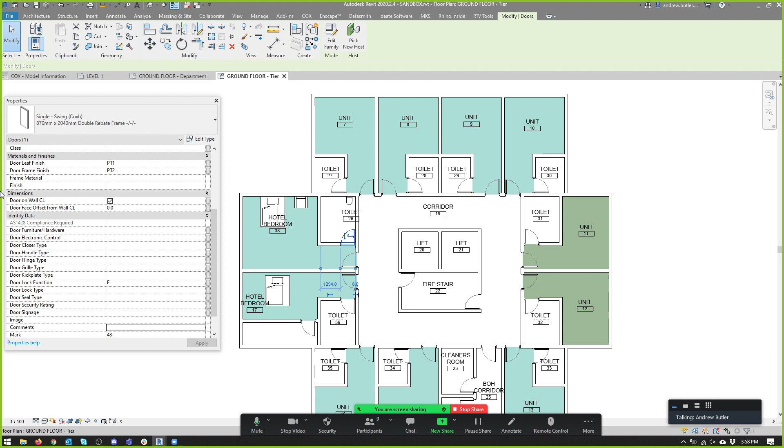And I'm not going to do it to you today. But I'd like to arrange a deal where we find you another room so that I can push this class a little bit longer. But I'm gonna do it the proper way, through administration, but maybe just mention to this event that I'm trying to find you guys a room that doesn't clash, that's also nearby, so that everyone's happy. Easy, cool, works for us.

Branches set up in the background. Go for it. No, we're gonna finish up because it is 4 o'clock.

How would you go about it? So you need to do your analysis and build it into a dictionary, and then pass that dictionary into the CSS function, and then have your CSS, and then apply your parameters. I think you have to do your own analysis. Yeah, I think that'll be my main exploration.

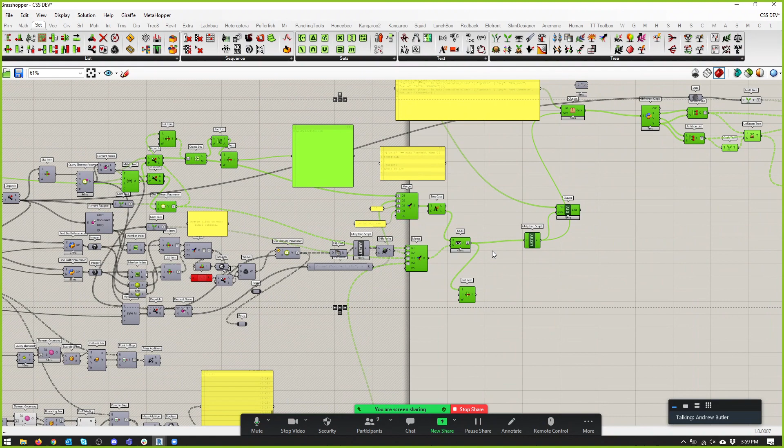Look, the most simple one here is where I've collected parameters. So if you follow that stream through, I'm using Control-Shift-Right here, by the way, guys. If you follow that stream through, all the way through, this part of the analysis is just getting parameters from Revit. It's just getting the name, the area, the tier, and the class.

I'm already picking doors up, so to work out where the doors are connecting rooms, you might have to do like this script here is giving me the doors from room and to room. So you might have to use that to also work out for the doors analysis, the from room and to room for the door, so that you can make a judgment about what happens to that door. Because a door going into a bathroom or a toilet, you'll want that to have a privacy snib, for example.

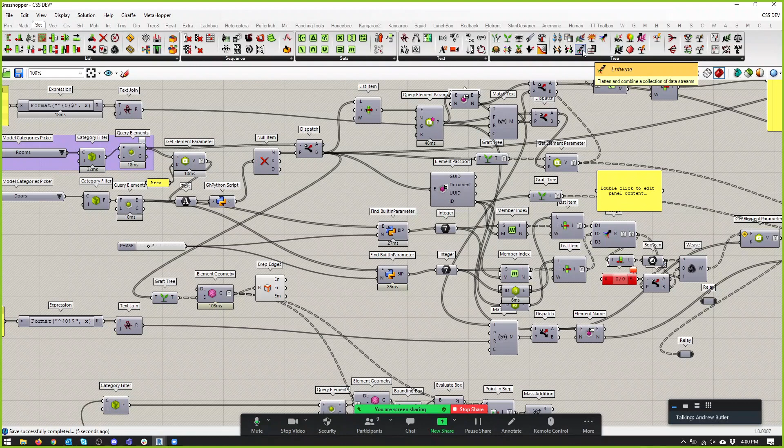Cool, that's a really simple one. Actually you obviously want a key card to get into the bedroom, into the actual unit. Yeah, actually no, this doesn't really work. I was just gonna say, like, would it be better to download some door that could enable us to visualize more of these effects?

You do whatever you want. If you want to download your own door families, use your own door families, I don't care. I'm not judging you on the Revit BIM model, I'm judging you on the CSS and the code that got you there. Cool? Okay, see you guys.